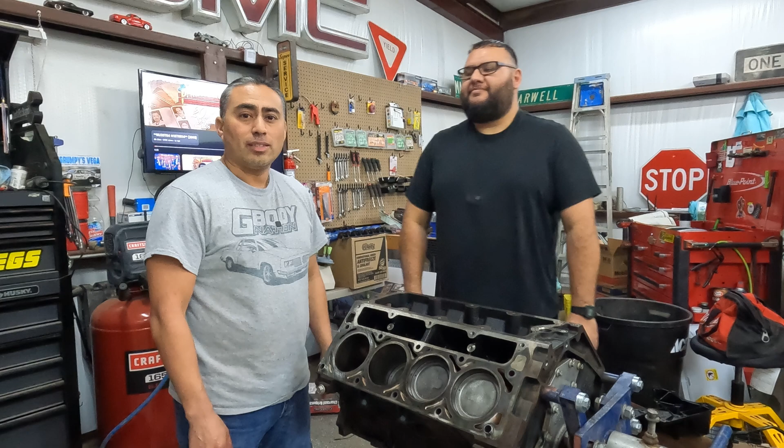We're here with Efren today again. What are we gonna do today, Efren? Today, I'm gonna show you how to install rings onto a piston, and then how to properly lube the new bearings that I got for the rod, I'm sorry, and then how to install the piston into the engine. And then from there, we'll go to installation on the cam as well.

Sounds good. This is his project, the one that had the broken connecting rod. Yeah, so now he's getting it all ready to go. Yep. So if you come over here, he'll teach us a little something today. All right. So I recently got with a friend of mine. He showed me how to clock these rings, because there is a certain way to put them in. On certain designs and certain brands, you have to install them a certain way.

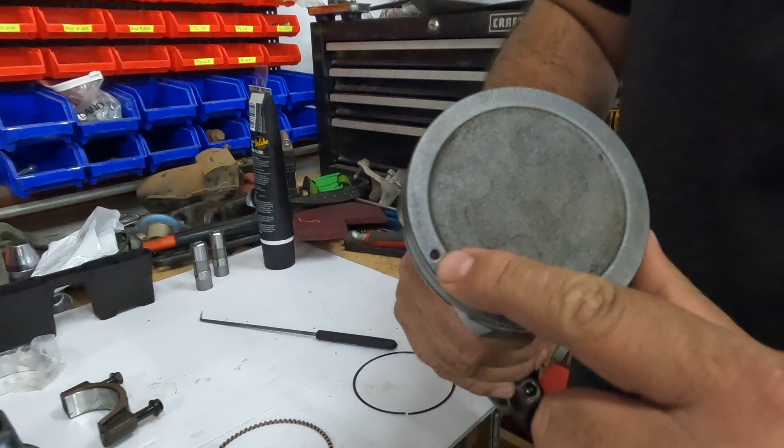So as you see here, I got a piston. Now there's a notch on this piston, this little dot right here. This indicates where it's supposed to go, and usually these dots go to the front of the engine. Now if you install it backwards, it's gonna run not good at all. The reason this dot is here as well is to kind of help you install the rings a certain way. Now this dot will be facing toward the engine.

On this piston here, you use it as a guide as well, like I said. There it is. Okay, so this one's installed 6 o'clock. So with this facing forward, say this is 9 o'clock. You're going to want this to the top of the engine. So it's 9 o'clock on this notch. Now when you install these oil scraper rings, you always want to install it with these two little edges facing upward, not downward, because it will go through. So you want them upward like this.

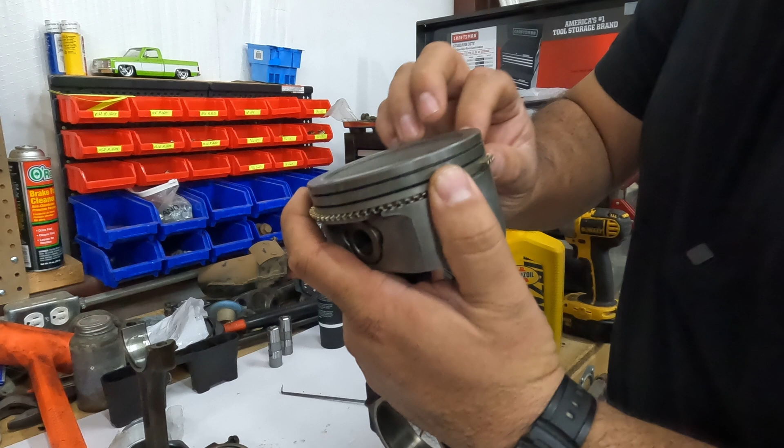So here's the piston. You install it at 6 o'clock, and you just bring it around like this, and when they butt together, you'll see it right here. They're facing upward. So from the dot, this is facing the front of the engine, right? Front of the block? Yeah, to the front of the block. And you're putting them over here on... Yeah, so let's say the dot's at 9 o'clock. So you want this gap to be at 6 o'clock. You're going to look at it as a clock. 12 o'clock, 9 o'clock, 3 o'clock, 6 o'clock. And that's how you do it.

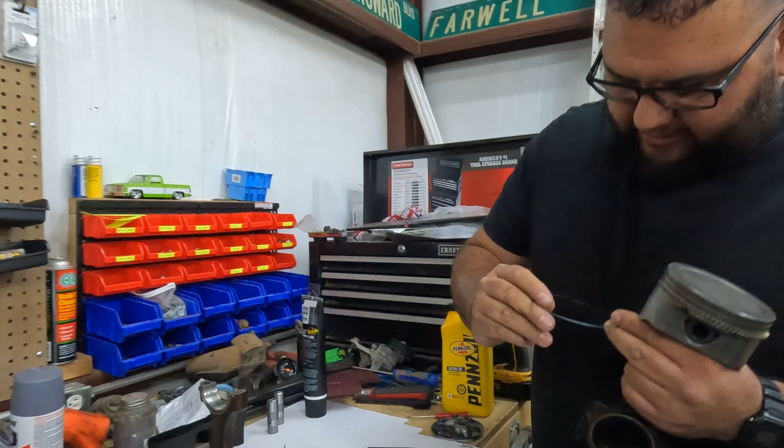Now, the next ring we install. On certain rings, there's some that have a design on them. They'll have like a little dot. This one doesn't have the dot on them. Usually the ones with a dot, it'll be the bottom ring under this one, and the dot has to go facing up. But this one doesn't have it, so I'll use this little crosshatch, this little cross that's on here. So right here will be one angle where it's going to be installed. I'll install it underneath the ring, and you slowly feed it all the way around.

You kind of expand it a little bit, and these are a little bit brittle, so they're kind of hard to install. So you got to be careful whenever you're installing them, because they can break. But once you get it in, there you go. So this one you did right at the... Yeah, like at 7 o'clock, I guess, right? Yeah, 7 o'clock. So this one will be at 7 o'clock here, and then the other one will be installed 180 degrees, so it'll be right at 1 o'clock.

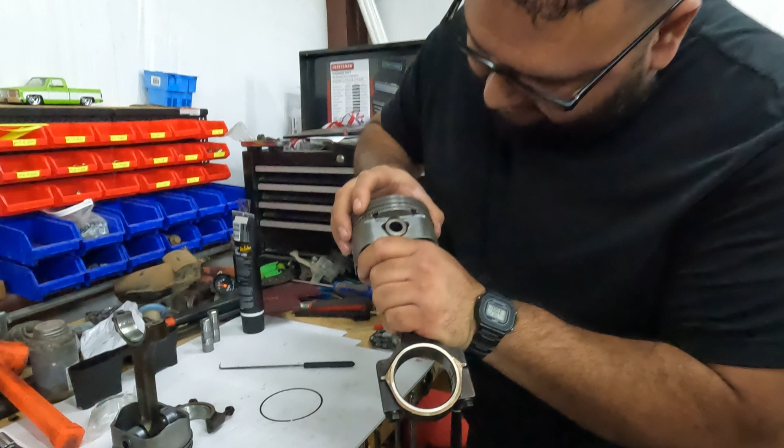Okay. So the same thing, and this one will be above this ring here. Oops. So where this one's at, as you can see, oh, I lost the gap. There it is. So there's the gap. So again, right there. You want to go 1 o'clock. Just use your fingers to guide yourself. Install it on the top side of this ring, on the bottom one, on the scraper, and then you feed it again all the way around. You kind of bring it, and there it is.

All right. Now the bottom oil rings are installed, and these just help keep it from getting loose, because that spring ring is kind of flimsy. Yeah. So these two are installed, so we're good now.

So it's slightly different than the old Chevy blocks, right? Yeah. There was a certain way we'd do all the rings. Yeah, okay, there's a certain way. I know a lot of them are pretty similar, but they're installed differently. Okay. See, I'm not too familiar with the LS. Yeah. We used to do 350s, the old stuff. Yeah. So I'm learning as well on this stuff.

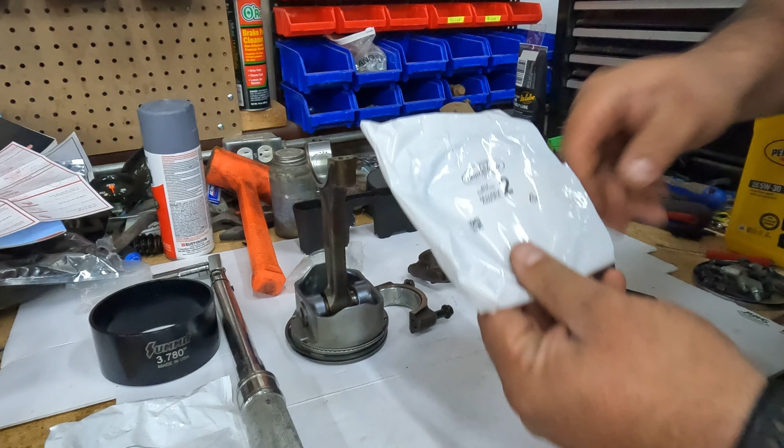Right here. So as you can see here, these are packaged. They all came in different packages. These 2 rings were in one package, and then the spring ring was in its own package. So this is the number 2 groove. And you gotta install these in order. So you always start with the bottom groove, because these expand a little different and they're a little bit harder. They got more tension on them.

So now, since we installed this ring at 1 o'clock, this one's at 7, and the notch is at 9 o'clock. So you want to install this one 90 degrees from this notch that you installed last. So again, be very careful when you're installing these.

Oh, another thing, I almost forgot. This one here is marked, the second groove ring has to be installed a certain way. It says top on there. Oh yeah. I don't know if you can see, there it is. So it says top, so that means to the top of the piston. So again, install it 90 degrees from this last notch. So we'll be putting it in.

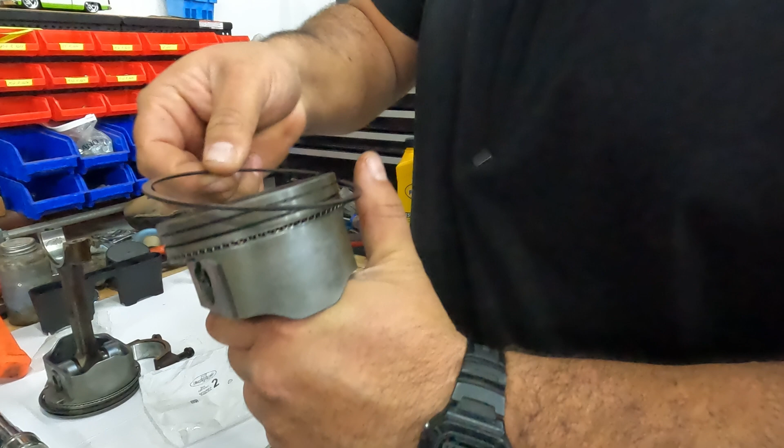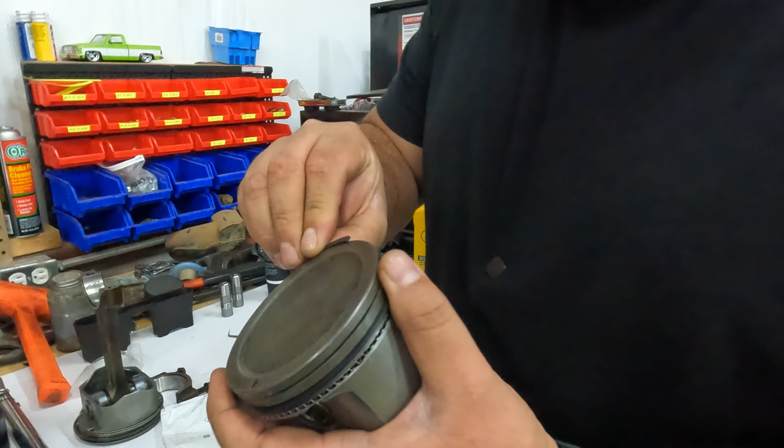And again, be very careful and try not to scrape the side of the piston. I've heard when you do that, it'll mess up the cylinder wall as well. So you can just kind of pull on it a little bit, not too much, but just enough to get it in there. Again, use your little cross. If your piston has this cross on it, you can use it as a guide as well, where everything's going to line up. So there's the second ring already installed with the notch that says top to the top of the piston. And then you went about 5 o'clock? Yeah, this is about 5 o'clock right here.

Okay. We'll move on to the last ring, which is the top ring. This one doesn't have a specific way to go. It can go either way. And again, on certain brands, certain setups, they'll have like a beveled edge on them, and it usually says the beveled edge goes down, I believe, if I'm not mistaken. It's just depending on the brand, but it'll tell you whenever you get it. This one will be 180 degrees from its notch.

So when you install it, again, press it in there slowly and kind of just guide it in again. And just slowly pull on the ring. And boom, there it is. It's installed. All right, so that was just 180 from the last one, right? Yeah, from the last ring over. Okay.

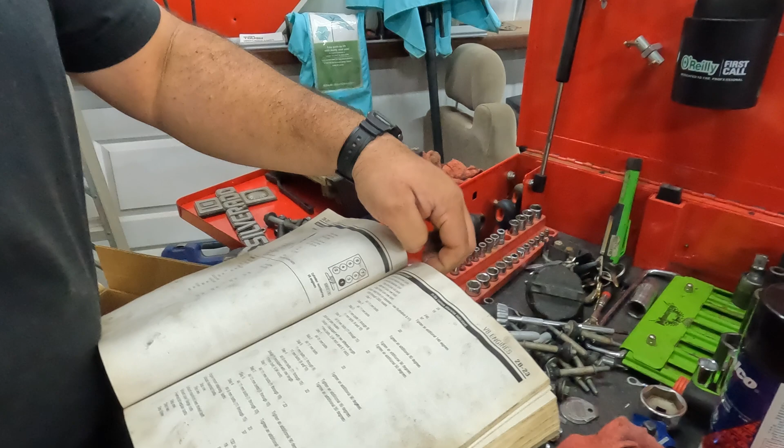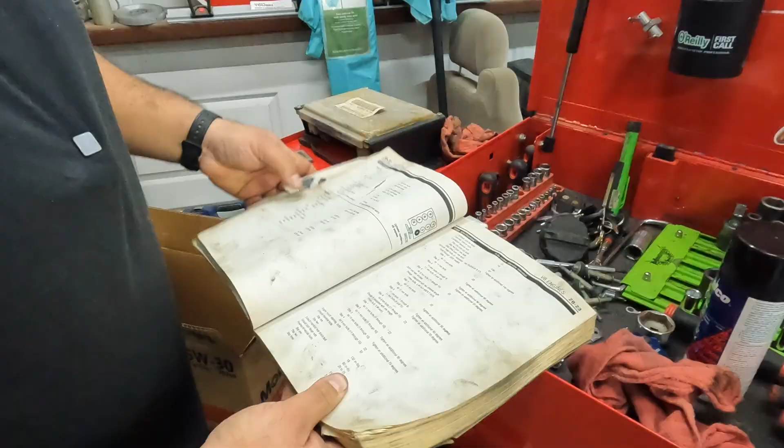So if you ever want to learn a little bit more, if you're a DIY guy like a lot of us want to be, it's always good to buy a manual like this. This is a Chilton book that I borrowed from a buddy of mine based on this motor, 99 through 06. They're all the same style motor. A lot of them have different specs according to what you're building. So as you can see here, I got some of these marked already to help.

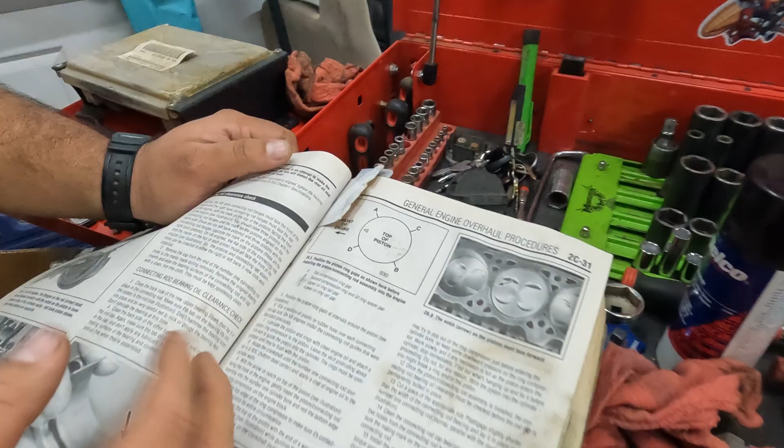Let's see. So this is the page right here where it shows you how to install these rings. As you can see, the lower oil ring rail gap, D, that would be the first one. Now it doesn't show the spring ring because a lot of times you just put that anywhere, but I've always been told to put it at the bottom. And the arrow is the notch, as I was saying, so it's at 9 o'clock shown here.

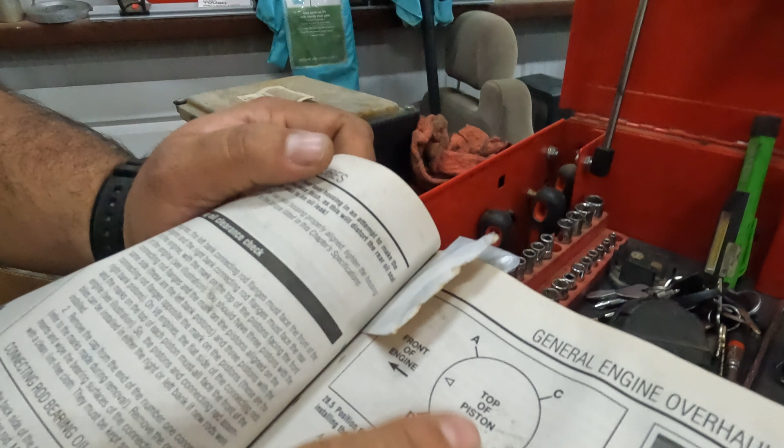Okay, so your first ring will be D, and then C is 180 degrees, and then your second ring, your compression ring, will be at B, which is 90 degrees from C. So you're going backwards basically. And then your first ring will be at A. That's right. And your first ring being the very top one of the piston, right? The very top, yes sir. Okay. So there's that part right there.

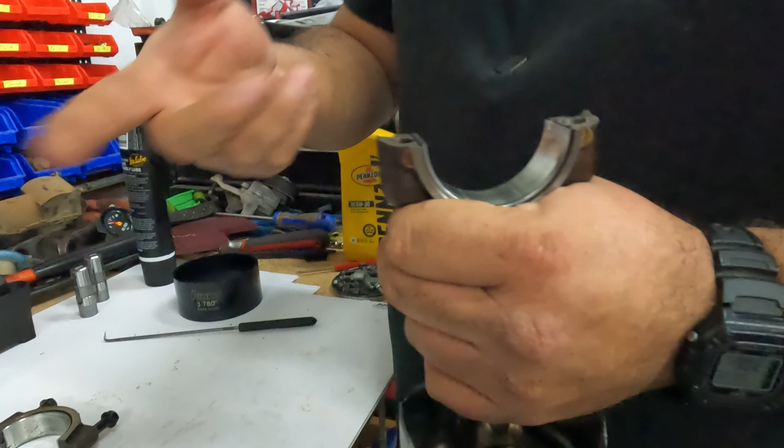I already prepped this one with some assembly lube, as you can see here. Oh, yeah. So when you put your bearings in, and I'll show you how to do that on that one here in a minute, you always want to lube it because you don't want to turn the crank dry, because you'll ruin it.

You'll ruin it. And it doesn't look like you will, but you'll ruin it. I've seen it. So what I do is I'll put assembly lube on here, with some guidance from a friend as well. He says not to lube it over this. You've got to go at least 1/4 of an inch down. Okay. Because if you get fluid or any kind of lube in between here and the rod, it will spin a bearing.

It's happened many times to a lot of folks that have done this. And I heard it from a lot of race car builders that it's gonna happen. So you always want to be careful when you're lubing these. You don't want any lube between the bearing and the rod. Yeah, rod. Okay. Because if you get anything in there, you're basically separating it. This is like a separator. That's how it works. And all this has a specific clearance when it's all put together.

Yeah, and right now I'm working with standard clearance. These are standard sizes. I'm not familiar with the standard size on the rod and the bearings and all that stuff. So yeah, this is a certain way to do it. Again, on the bottom cap as well. So you can see here, I'm a little bit under here, I'm a little bit over here, but it's okay. You can always wipe it off to keep that from happening. Okay. So you don't need a lot of lube. You just need enough to film it, just to make a clearance.

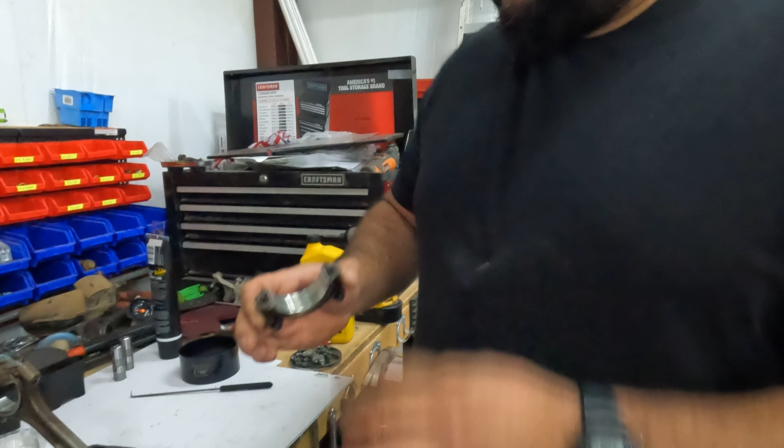All right, so now I got this installer here that I borrowed from a buddy as well. It's always good to lube it. I got a light film of oil on it just so it'll slide through real easy. So what I do is I'll get the piston, and always put your dot. I'll show you that here in a minute, but you always want to put your dot facing toward the front of the engine. But when you put your piston in, put it in carefully.

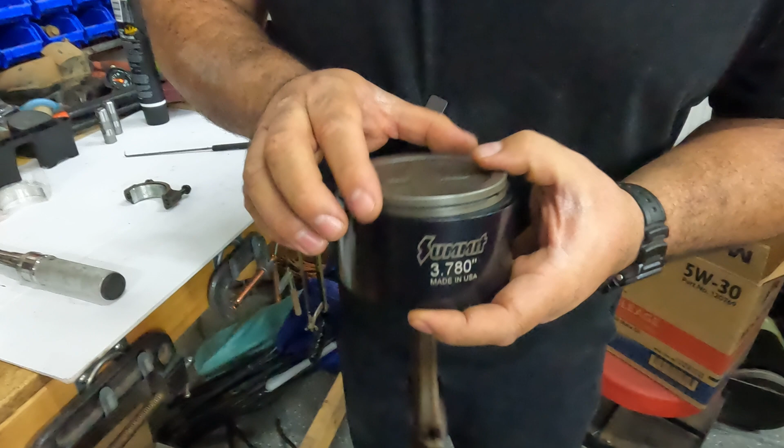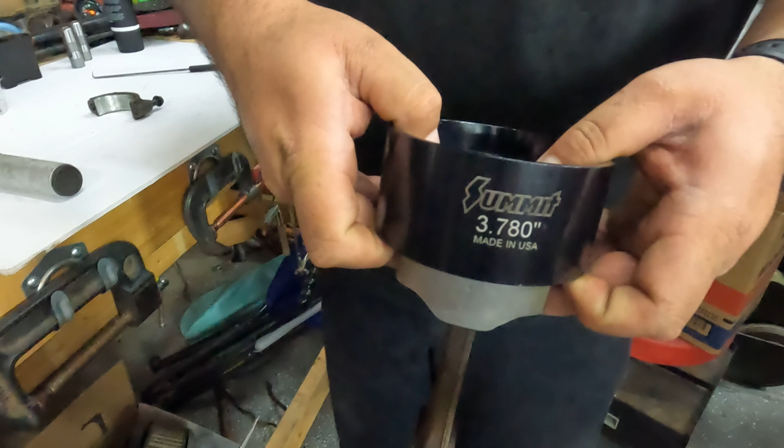So these piston rings are not going to allow you to put it in. So you just kind of work them in a little bit, as you can see here. Kind of work it, and then you slide your piston in. Nice. And then you get it as far down as you can until your skirts show. And the reason why you do that is, we'll come over to the engine real quick. Right. You don't want the rings to come through, because you want the rings to stay compressed as you're sliding it in.

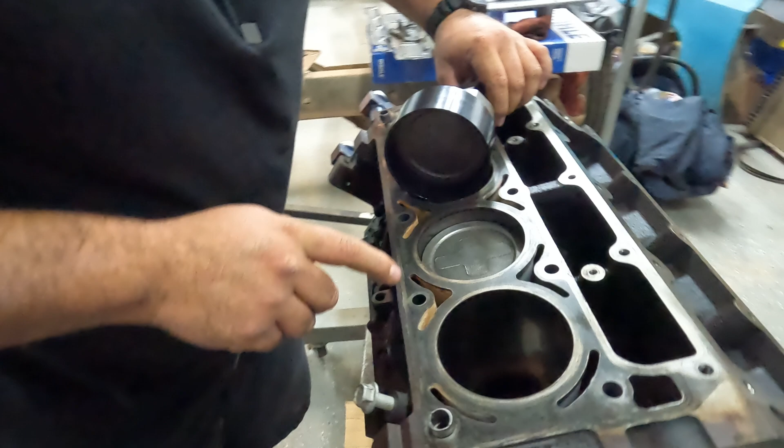Now again, your dot facing forward. To the front, right? Yeah, to the front of the engine. So we're going to install cylinder 2. Piston cylinder 2, yes. This is piston number 2. Cylinder 2. Okay, so before I move forward on that, you want to put a little bit of oil on the cylinder and make sure your cylinders are clean too. As you can see here, this one's a lot clean. So you always want to lube it. Now when you lube it, the rings are going to get a hold of that oil and push it down.

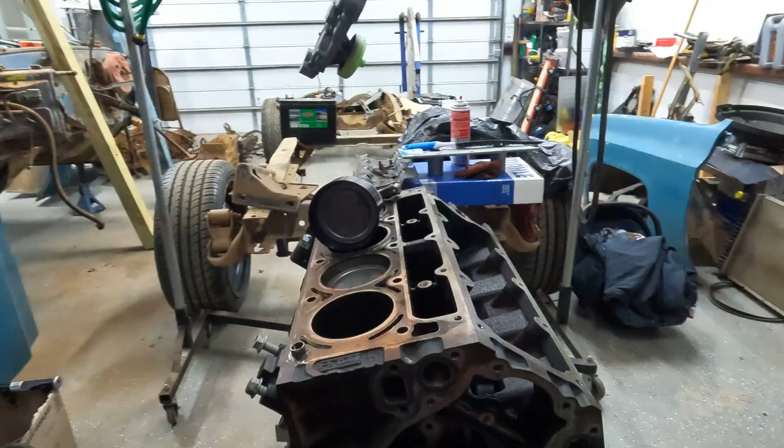So I just got this container here. What I do is I'll put some oil along my finger, and just kind of rub it in there. And you don't need to lube the whole cylinder, because it's gonna push all the oil down once the piston gets back in there. So just what your finger can reach? Just what your finger can reach. Just kind of do that.

And I know it sounds kind of repetitive, but I just repeat to make sure, if you're not sure how to. Yeah. That way, I'm asking them again just to make sure that we're all on the same page. Yes. Including myself, because I haven't done this kind of stuff in a while, so I'm refreshing my memory right now.

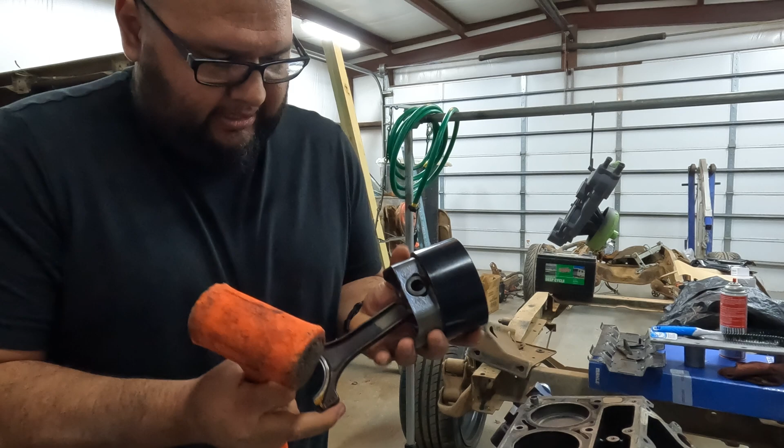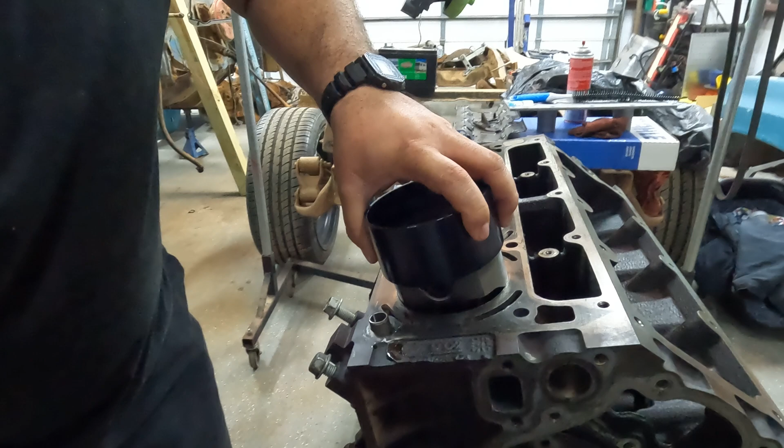So when installing a piston, always get yourself a soft hammer, or dead blow, or whatever they call them. And you get your piston. You don't want this touching the cylinder wall, so you want to go in as carefully as you can. Get your piston lined up into the cylinder here. All right, cool. So now the skirt's in, and come along over here.

So you always want to make sure to keep your notch perpendicular to your edge here. You can see it, and if you've got a good eye, you'll know. You're talking about this little notch here, right there. Yeah. Okay. And you can see it on the other pistons here. They're all facing forward. Okay. Now you want to use the end of the hammer, and you can use a wood hammer too. Just barely tap it. Just make sure this is all the way down, seating real good, and you just hit it.

And there it is. It's in. Now we move on to the next step. What I can do too is kind of bring the block over a little bit. Kind of keep it level to the floor as well. It might not be that level, but it's close enough.

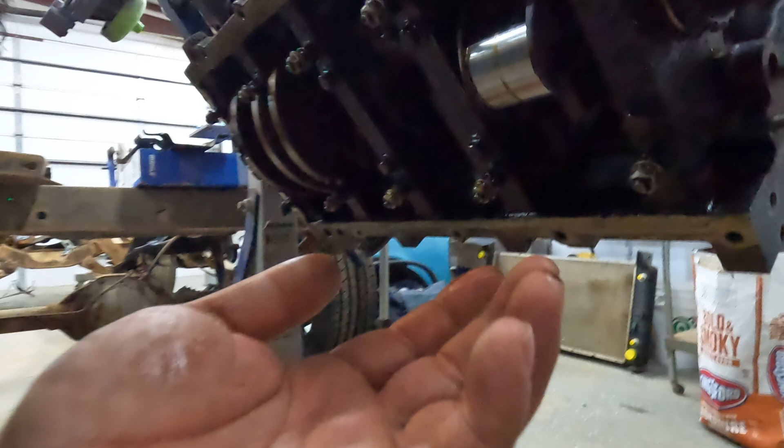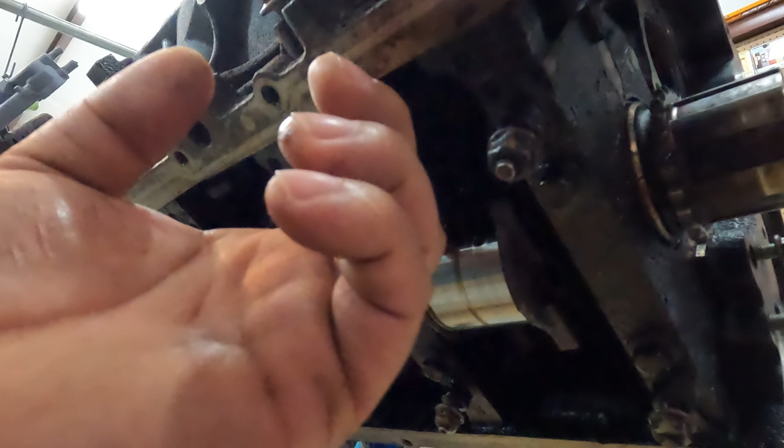Yeah. And you want to come down here, and as you're tapping this in, you'll see, oh, block's coming. You're moving it. Yeah. So I'll bring it back this way just to here. So you just want to kind of guide it so it doesn't bang on your crank? Yeah, you don't want it to hit the balancers or the weights on the crankshaft, and you kind of want to guide it as well. All right, and there's that one. Once you're done there, then you just flip your engine over.

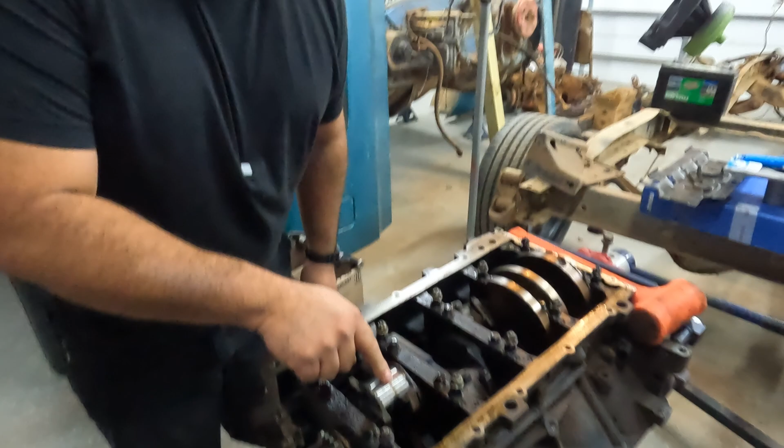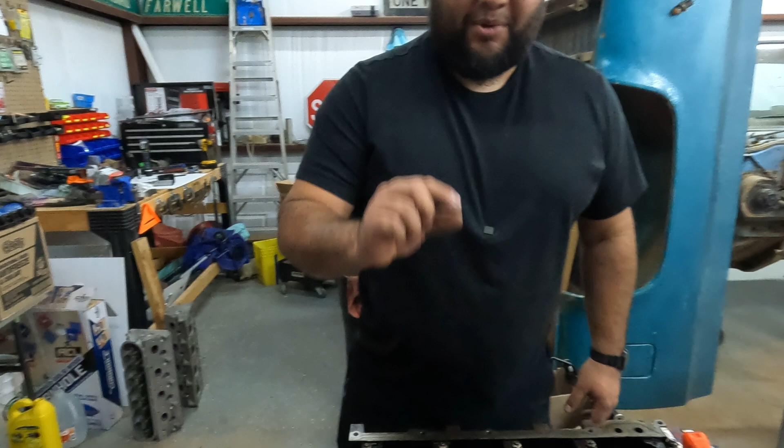All right, set this here. So another thing I forgot to mention, make sure your journals are clean. Make sure they don't have trash on them. I did clean this one before we started. So always make sure these are clean, there's no trash, because the clearance on these things is like thousandths of an inch. I mean, you're talking like the size of a hair. It's small. So any little bitty trash that's in here will ruin that cap, or it will ruin the bearing. So yeah. All right, let me get this bearing cap right quick.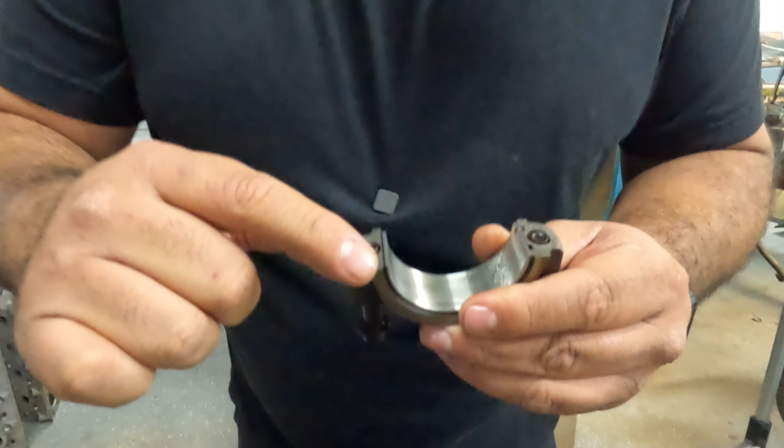Now, a lot of these rods, you cannot change this cap to another rod. It will not fit. And the reason why, when these are made, they break them. You can see how this one's broken. When this was broken off of this rod, it has to be matched up to this rod only. And they only go on a certain way as well. As you can see here, this edge is rounded and it's squared off right here. So you got to put it on the same way. See how it's squared off here and then it's rounded? This is the way you want to put it on.

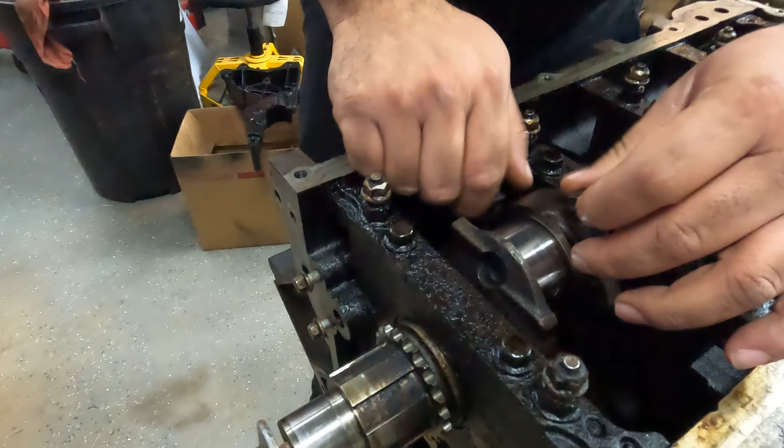Okay, got it. What I do is I'll tighten them by hand first. Get them all the way down. And I'll show this process on the next rod before we take that one apart and clean it. So we'll get this on, and if you don't have a torque wrench, you can actually buy these at Lowe's or Home Depot. O'Reilly sells them. I think they rent them out too if you don't want to buy one. These are real cool to have.

Now in the book, I went over it. This is supposed to be at 15 pound-feet, or foot-pounds like a lot of us say. So it's already set at 15. So you just do increment turns. So I'll do a little turn here, and then this one a little turn. That way it goes down evenly? Yeah, that way it goes down evenly. You don't want it to be too tight on one side and not tight on the other. Right. And then you'll see the torque wrench click right here. Oh yeah. And then just to make sure it's all the way down.

Now, these are torque to yield, and torque to yield means once you get it to its first torque setting, then you got to do an angle torque. And I have a torque wrench for that, so I'll show you out here how to do that in a minute. And the torque to yield, once you use it once, you can't reuse them, right? On certain blocks you can't. On certain ones you can. And these are reusable. Okay. I actually asked a friend of mine. He said these are reusable.

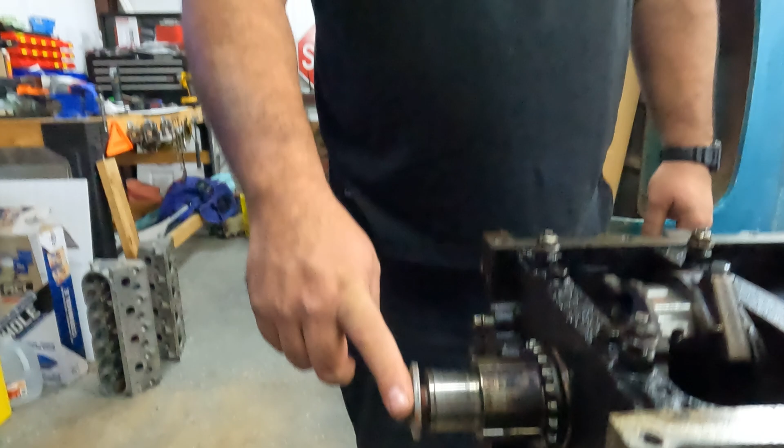All right, because that would be a question I would have. So I'm asking for myself as well in case I ever needed that. Because I know some of the engines we worked on were torque to yield bolts, and they said do not reuse, but I wasn't sure. Yeah. What you can and can't. At the dealership I worked for, I learned that on a lot of the newer engines, a lot of the bolts you couldn't reuse again. Like this bolt on the new engine, you can't reuse it. You can reuse this one for 3rd gen LS. You just got to torque it a different way.

So now, always make sure this doesn't move up and down. As you can see, it's not moving up and down. The clearance is just right, but it's able to move side to side. That's okay. That's no biggie there. Once you put the other rod in, you'll have your little bit of slack there, but that's okay. All right, now we move on to the other piston and rod. All right.

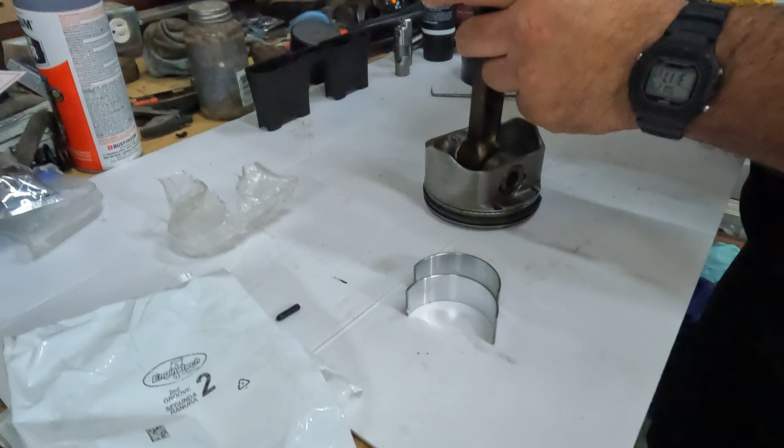All right, so these right here are the bearings. Now, a while ago when I was talking about making sure everything's clean, you want to make sure these are clean too, because these do come oiled from the factory that makes them. Okay. So yeah, they can have a little bit of dirt or something. Yeah, exactly. And they'll have a little bit of a film on them or something. So again, as you can see here, this belongs to this rod.

And when you're working with pistons and rods, one at a time, every time. Do one piston at a time. Don't take them all apart and then go back to putting them together and mix them up, and it becomes a mess after that. A lot of times too, you can always mark them. Get you some paint markers, different colors, and mark them. That way you'll know which one goes where.

Because we used to mark them 1-1. Yeah. And we'd mark it here. Yeah. And then on the other side. Exactly. And a lot of older mechanics will tell you that. Make sure you mark your rods. But me, I like to work on one at a time because I'm that kind of guy that will mix something up accidentally, and it's happened before. Anybody will tell you that it has happened.

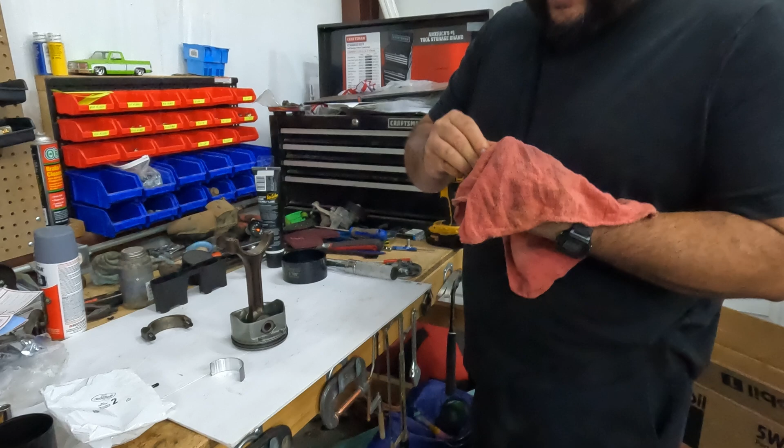Sorry, let me get my cleaning rag real quick. All right. Man, it's been a while since I've messed with this kind of stuff. Me too, man. Honestly it's been a while for me. I put some engines together lately, you know. Yeah. But I didn't have to mess with this part. It was just camming, heads, that kind of stuff. The intake, of course. But this has been a while for me on LS. This is the first time. Oh, okay. So I haven't really messed with LS pistons. I'm learning as well, just like everybody else.

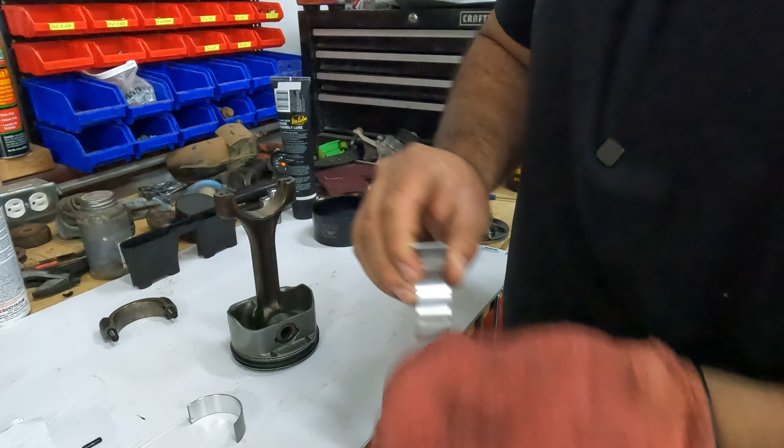All right. So like I said, clean these real well. They just have a light film of oil on them, just to keep them from rusting, which these don't really rust. I think a lot of these are aluminum now, so they won't really rust, but just to keep contaminants off of them, like dirt and stuff. They do that for that reason.

See, when I'm going to do something, I look up on YouTube as well, and sometimes I don't find anyone who actually shows you step by step, and they just kind of assume you know the stuff, and sometimes you do not. Yeah, exactly. So I watch another video till I kind of piece it all together. Exactly. So this way it's all in one, and you can just get it done if you need to.

Now this piston did sit out. I had already cleaned a lot of these prior to this video, but I'm going to clean it again just because you never know what little bit of trash is floating around. So just go over it a little bit again. Make sure there's no oil, there's no dirt. Same thing on the bottom one. Make sure there's no oil or dirt. Just go over it again, just like that.

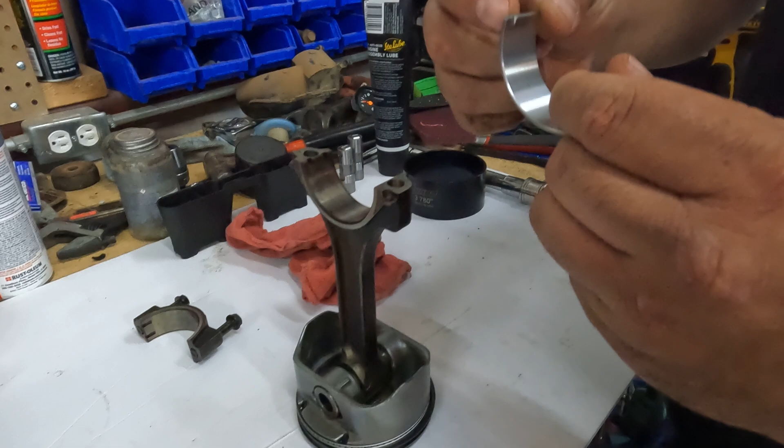And then there's notches on these rods. There's 2 notches, all right? And the reason for these notches is for these rod bearings. They have a little notch on them as well. You want to line them up with that notch. You can see right here. And evenly press on it. You'll get it in there. Make sure this notch lines up with it, and boom.

And it's in. It looks like it's pretty even on there. If it's not, you can press one side and it'll slide over. But once you get it in there, it's staying in there. It's not going anywhere. Now, same thing with the bottom, with the cap. You're gonna line up your notch.

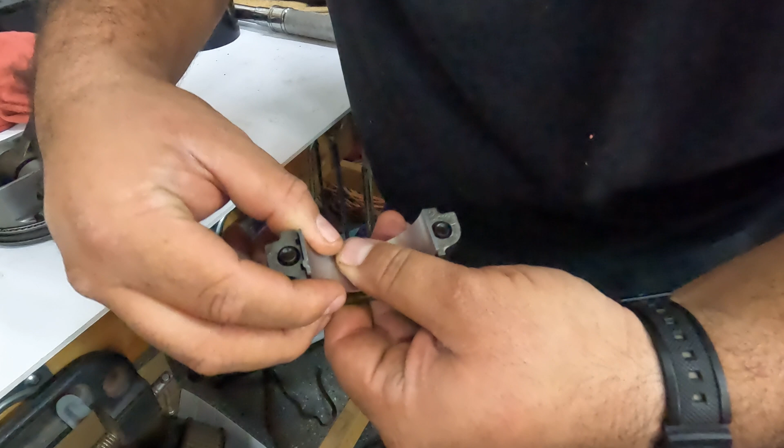Line up your notch with the one on the rod, and it's evenly pressed down, and there it is. Again, you can see right here where it's kind of popped out, so you just press on it. It's good to go. Once you have that on, then move on to assembly lube.

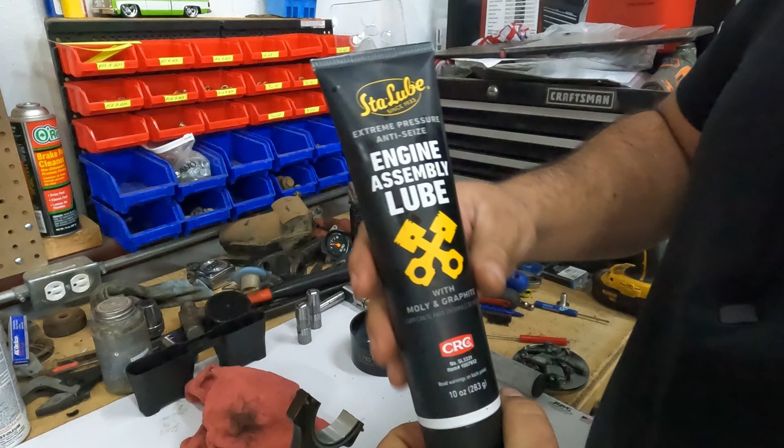What kind do you use? What do you like? Well, I just bought one. This is the Sta Lube. This is assembly lube. It's moly and graphite, which somebody told me I could use. It wasn't going to hurt it. Sounds good. That way, in case someone doesn't really know about that either. And there's different kinds out there that people use.

What I will do is put a little dot on my finger. The reason why is, like I said, you don't want a heavy film on here. You just want a light film. See, I got a little bit right there. Just kind of clean it off, because again, you don't want this in between the bearing and the rod. And there it is. Just a light film, nothing heavy.

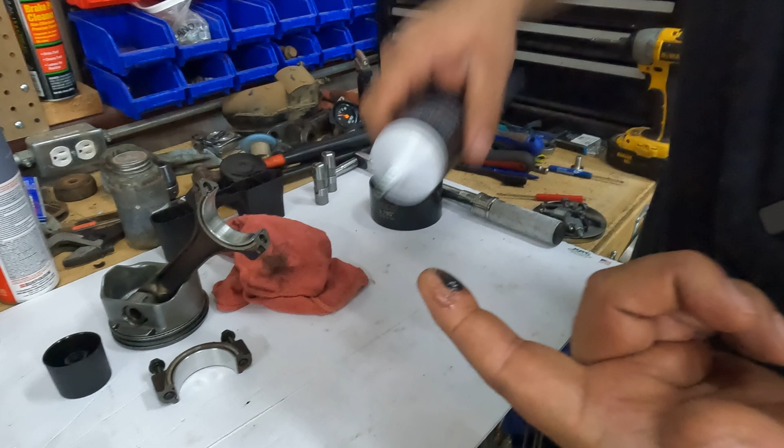The reason why you want a light film is this will spew out once you bolt it into the crank journal. And you don't want it to get in here again, because it will get into the sides. So just do a light film, and there it is. All right, so there's that part. We'll go ahead and install this one as well. The rings were already installed on this one, so we'll go ahead and get it ready.

Let me put some oil on this installer right quick.

It's exciting, man. I like working on engines. I just don't do it very often. Yeah, I know. And this has been a long time, so this is pretty cool. My dad used to do all this stuff when I was a kid, and it's fun. It brings back memories. Yeah, I know. I did my first engine back in college when I took this course, and I enjoyed it very much.

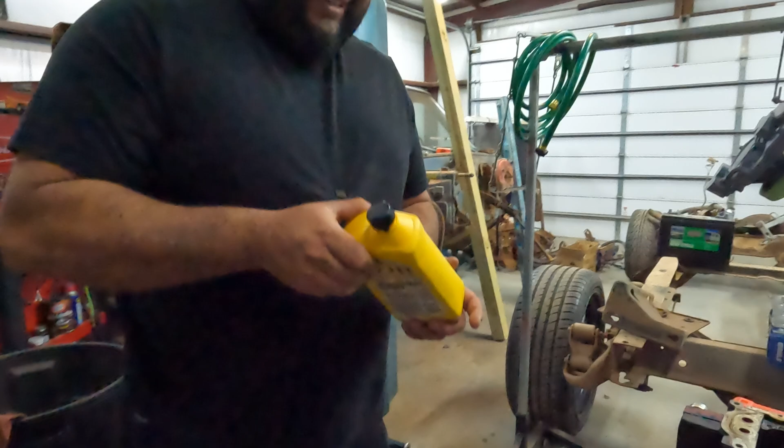But if you have the patience for it, man, go for it. There's a lot of videos and research out there on how to do this stuff, whether you want a basic daily driver engine or a racing engine. Always find a guy too, man. There's a guy out there that knows tons about this stuff. The guy I've been talking to, his name is Michael Jordan. Down to earth guy. He's been guiding me a lot, and he actually has a race truck he's building right now.

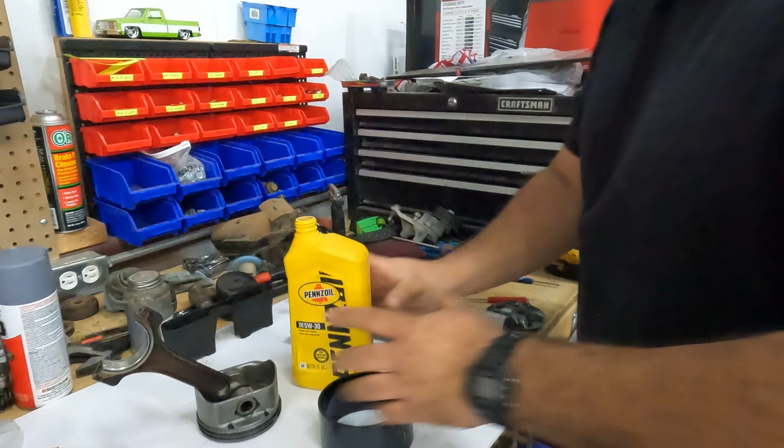All right, so I want to lube this again since the last piston scraped it off. I'll get my finger in there, get a little bit of oil, and work it around the tool. As you can see, it's just a light film. You don't want it heavy or dripping. Same thing on the cylinder. Let me come back over here, put this back down, and rotate the engine.

So we are installing the last piston, which is piston number 1. Number 2 was the one that was broken, right, Efren? Yes, number 2, the rod was broken. And you put new rings on all the pistons prior to today. So we just left two of them to show everybody how he did it. Yes. All right.

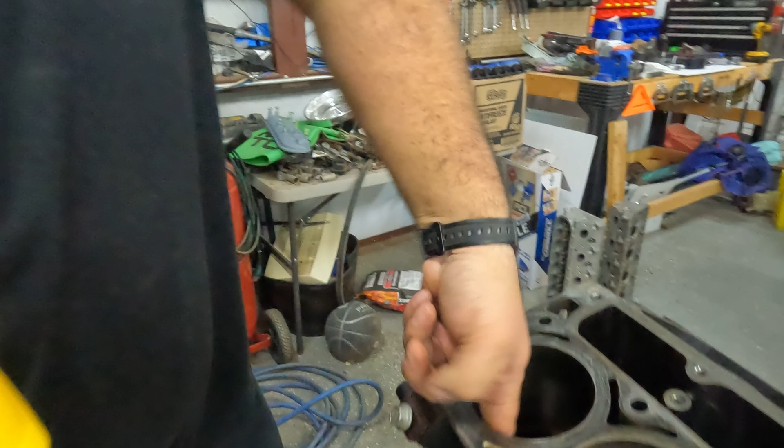So again, put some oil on your finger, get a little bit on there, and then work it around the top part of the cylinder. All right, you'll see it's got a light film in there, and we'll install it.

Again, I'll show you again how this works. As you can see here, that second ring, the compression ring, is already in on this side, but it's not on this side, so you just kind of work it in there. See how it slides in real quick? Here's the top ring, same thing. Push it in, slowly guide it down. Again, you don't want the bottom ring to show, you just want the skirt to show, okay?

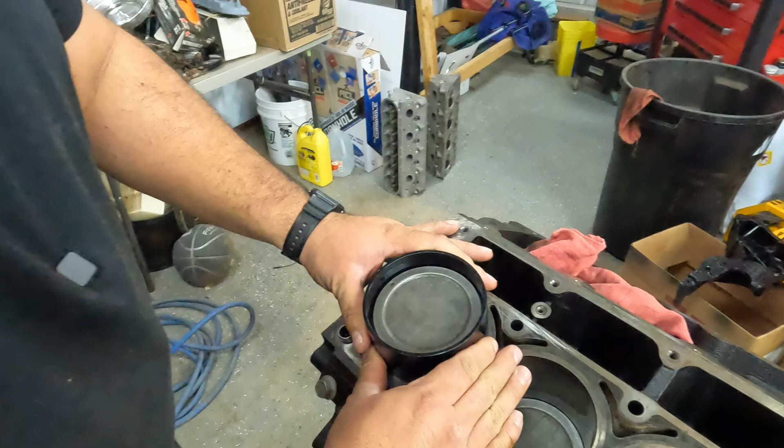So, all right, I'll bring this over here. And again, you want the notch facing to the front of the engine. So you slide this in very carefully. Okay, make sure your tool's flat. Make sure your notch is as straight as you can get it. Kind of eyeball it and watch it. And there it is. It's in.

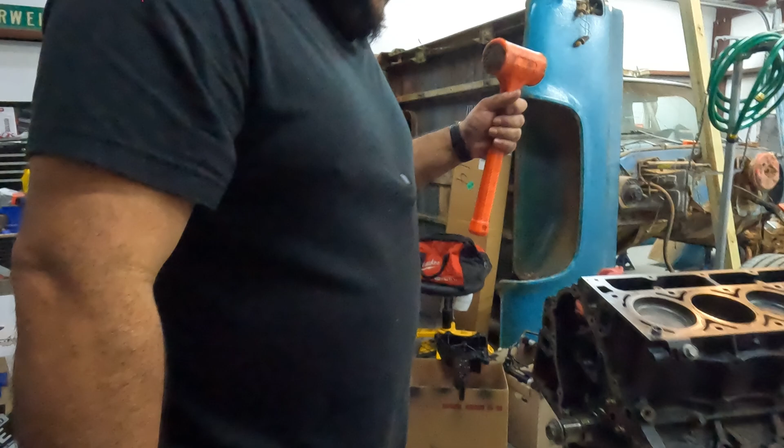Now, why I say you need to keep this flat is because if it is a little bit off, a ring can come out. And if you keep hitting it, you can break a ring, and you'll ruin the piston as well. So you don't want to do that. All right, so back to the last part of this. Same procedure as the first one? Same procedure as the first one. So he's going to guide it in, and you'll see the rod here in a minute. You see it? It's coming. And there it is. It's all the way in. And then we'll put the cap back on it.

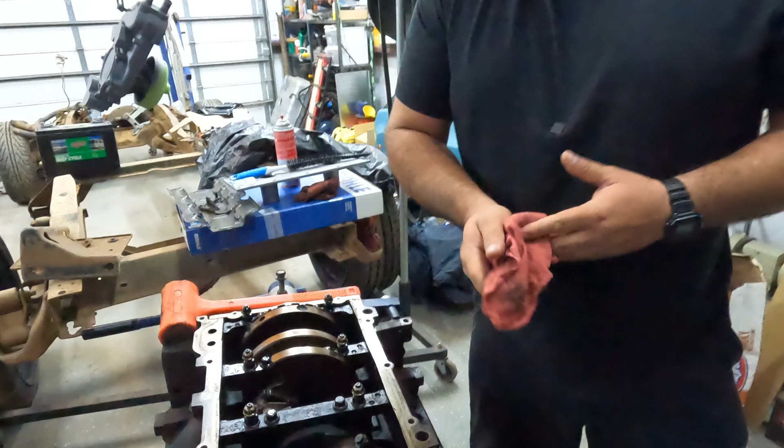Just a rule of thumb when you're doing work like this, it's always good to have a buddy with you to help you hit the piston down while you guide it, and a lot of times to hold the engine, because you want to leave the engine kind of loose to be able to rotate it whenever you need to. All right, again, make sure your journals are clean. Make sure your rods are the same. You've got it squared off here and beveled over here, so you want to match this up exactly. And tighten everything down by hand again. Just make sure you get it as tight as you can. There you go. And then torque wrench.

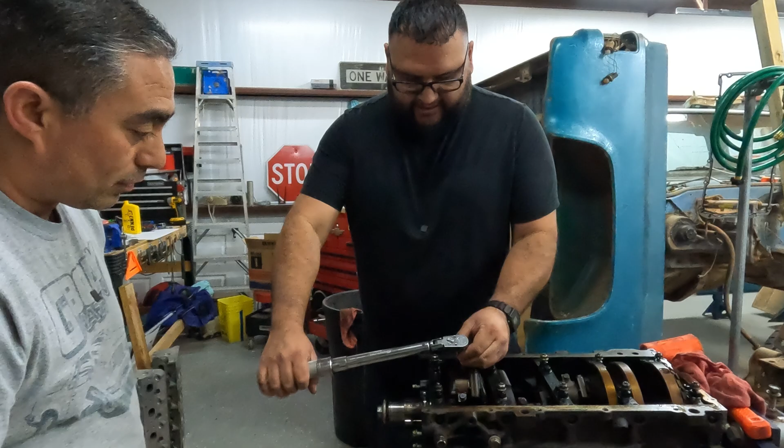So now when you torque it down to the 15, since they're torque-to-yield, you still have to do something else to it, right? Yes, I have to do an angle torque, and I'll show you how to do that in a minute. So again, slow turns. And then you'll feel the click. Right there, there's the click. These are all torqued at 15 pounds right now. I did all of these in order according to the crank: 7 and 8 first, then 5 and 6, then 3 and 4, and then 1 and 2. So the way I put them in is the way I'm going to keep torquing them until I'm done.

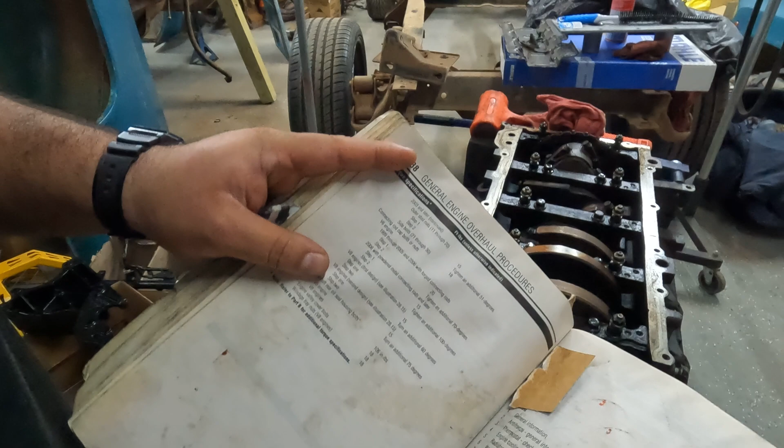I'm going to turn the crank to get rods 7 and 8 back up. Get them up where you can get to them? Okay. And there they are right there. Okay, so here in the book, I had this page saved for that reason. General engine overhaul procedures. I'm on the connecting rod cap bolts or nuts, and these are bolts. Some of them have nuts. So this is a V8 engine, second design, and the reason I know it's a second design, this bolt right here has a little notch in it that keeps the bolt from falling out of the cap.

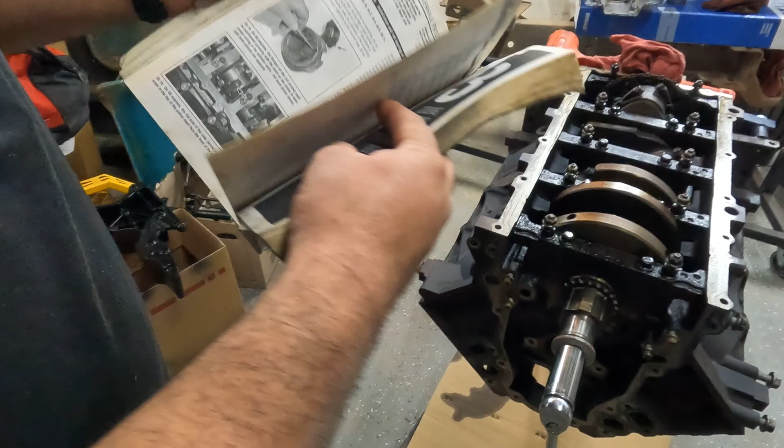So, second design, step 1, 15 pounds. Done. Step 2, you're going to turn an additional 75 degrees. So let me get my other wrench out real quick.

Yeah, I remember the ones that just had the nuts. We'd put some little rubber deals on them so they wouldn't bang on the crank. Yeah, that was a long time ago. And actually there's a kit out there. You can put the little rods in and put some rubber hoses over them to do the same thing, just to guide it. Of course, I don't have any of that.

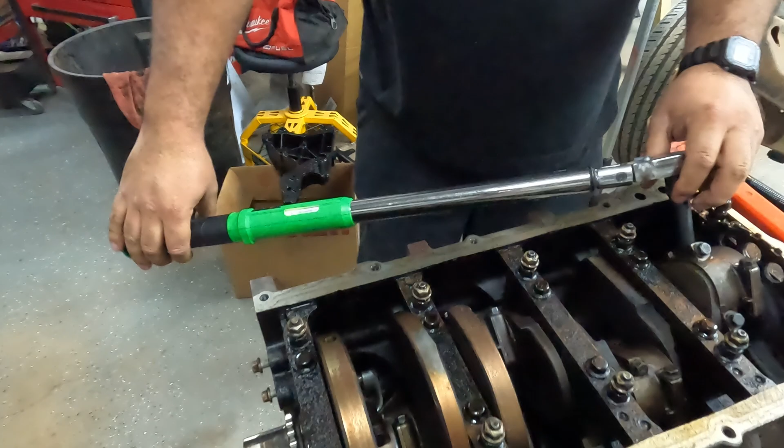And I've got my little friend here, already set up for 75 degrees. And we move forward. So again, start with the one you installed first, which is number 8. And you'll see the indication here on the tool. So you'll go. There we go. Okay, 1 degree over, but it's fine. Okay.

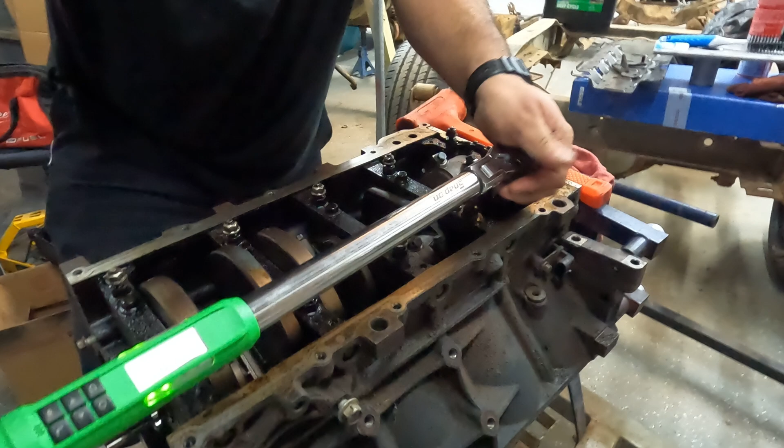All right, there we go. So that's how you do it. Same thing on number 7. There we go. Again, it went a little degree over, but it's fine. It's no big deal. So it shows you on the little screen where you're at, huh? Yeah. And you'll see it. You can follow it. That way you can see. Yeah, let's see that. There we go. Cool.

Okay. Just so we don't make this video way long, he just did these. He's gonna just rotate, do these. We're just gonna go all the way to the front, and we'll be back shortly. All right, so getting to the last one, right, Efren? Yep. Yes, sir. All right, that's good. Okay. Well, I said last one, but it's last set because it's the last two cylinders. There we go. We're done.

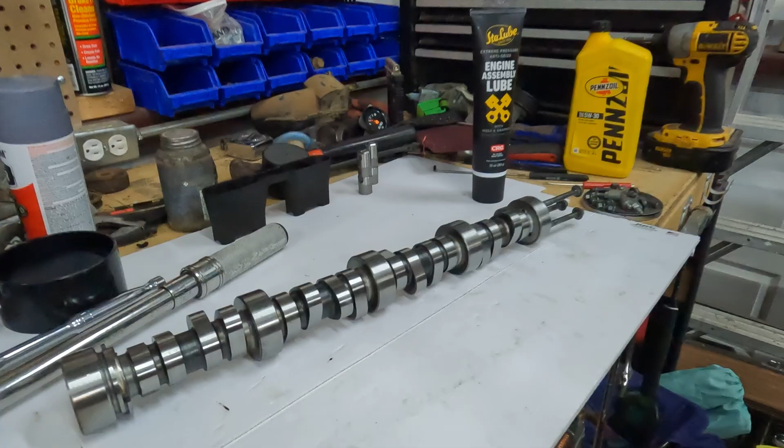That's the torque-to-yield bolts, right? There it is. We're done with that part. Finally. All right, guys. Time to put the cam in. Here it is. Sloppy Stage 2, courtesy of 806 Rebel Racing, West Texas.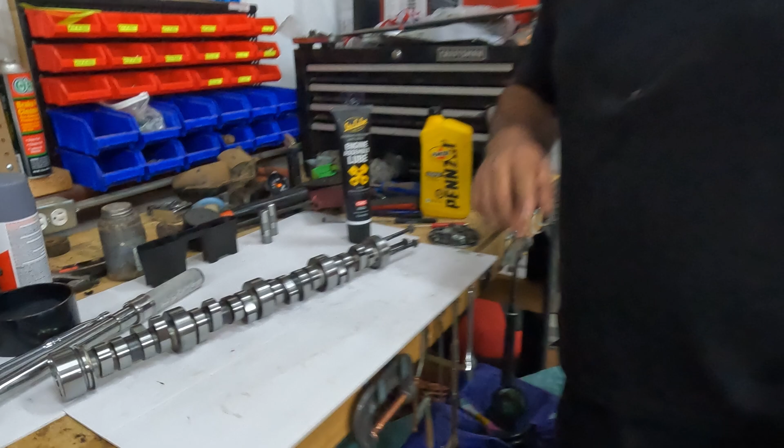And you don't have the tool, right? But for people that don't have it? Yeah. This is what I did. I actually took the water pump bolts and just stuck them on the end here. As you can see. That'll work. And it just helps you guide it in a little bit better. So trying to put it in without it is hard. Yeah, it's really hard to put it in without a tool or anything.

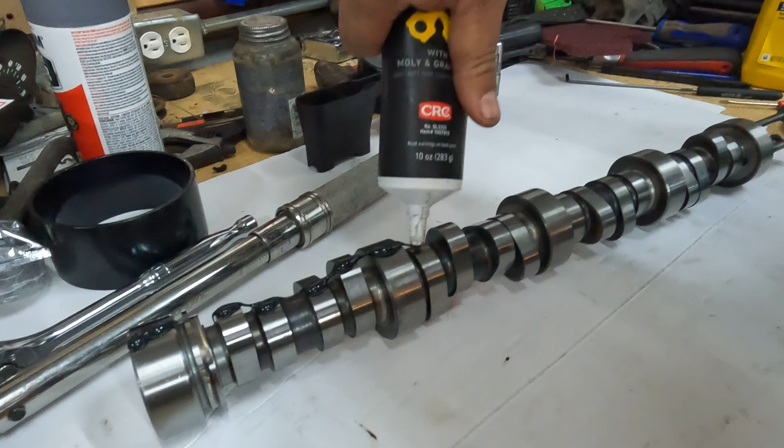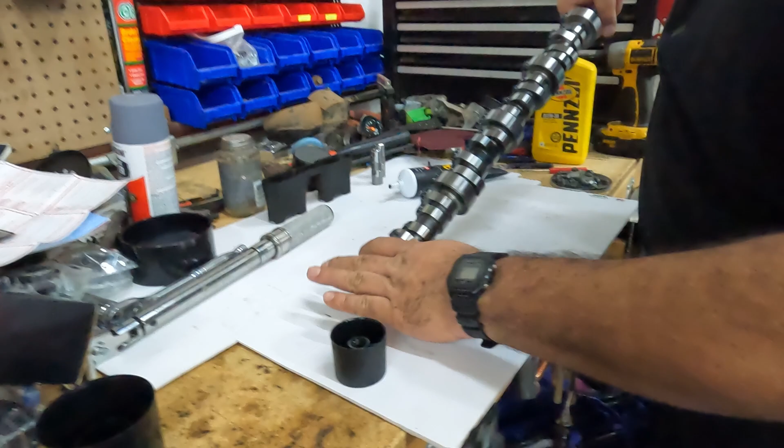All right, so now we're gonna lube this thing up. And on this one, what I'll do is I'll put a little dab here and there. Put them on all the lobes. And once we get everything pretty much ready for lube. Now, normally I wear gloves, but not today. So what I'll do is kind of just run some of this lube through the lobes a little bit.

And the reason you want to do that is because when you're sliding it in, these can get caught on the cam bearings. And you don't want to mess up any of the bearings, or even the cam. You don't want to mess the cam up, period, either. So just kind of, again, like we did the rod bearings, just do a light film all the way around. Rotate it. Just like that.

A lot of people cam, and this is what they do. Yeah, and a lot of them do it for performance or whatever, you know. And I'm just doing mine for sound. I like performance, don't get me wrong, but I'm a budget kind of guy, and I don't like to spend a lot of money. So one day maybe, but we'll see.

All right, now there's the cam. It's ready to go in. All lubed up and ready to go. So what we do now is you slide it in slowly. Just kind of let these sit a little bit. Sometimes these are a little bit higher, but you just kind of work it in and it'll make its way in.

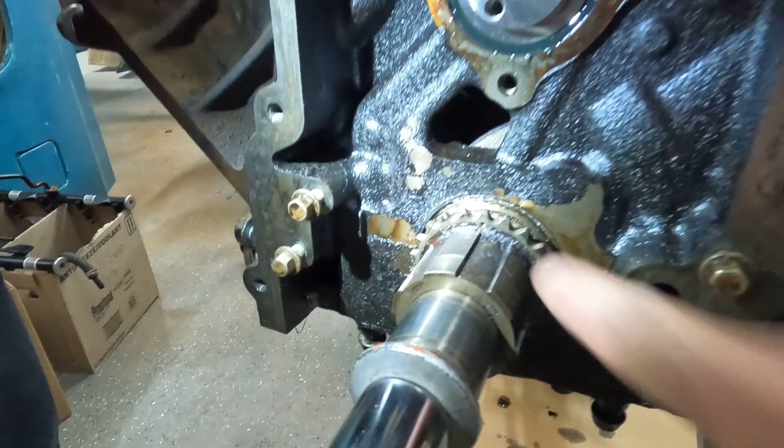Okay, and it's done. So now you're just removing the bolts, right? Yeah, right now I'm removing the bolts. I believe it's the same as the small blocks. As long as this dot right here, you can see it. Oh yeah, there's a dot. You want to make sure that's at 12 o'clock on the block. He's talking about that dot right there, just like the old blocks used to have. That dot will be at 12 o'clock. Cylinder 1 will be at top dead center, which is this one right here, guys. Yep.

Okay. Once you have your crank lined up, next step is you'll bring your cam sprocket. So this is the back side. This will go toward the cam. There's a notch for this little dowel pin right here. So you'll put that notch on that dowel pin.

Let's see. There it is. Okay, once you have that in, then there's also a dot on the sprocket. You see it right there. You want to line the cam up 6 o'clock with your dot on 12 o'clock on the crank. Two dots, will these match to each other?

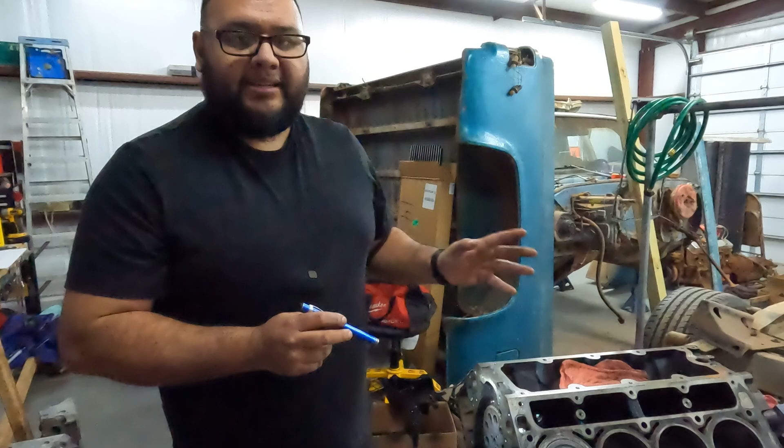Yeah, and the reason for that is for timing. This cam has to be in time with the crank because every one of these cylinders has to be in time with your injectors, with your coil packs, everything. And if they're not in time, this engine will not run. And if it does run, it's gonna run like crap. Yep. So definitely, it's always about timing on all the engines. They all run on time.

Some of them run on a higher advanced time. Some run on a retarded time, and it just depends what you're running. It just all depends what you're doing. Again, this is a stock build, so we're not doing nothing too radical on it. All right, once you get these lined up, your dowel will stay where it's supposed to be. Take your sprocket back off.

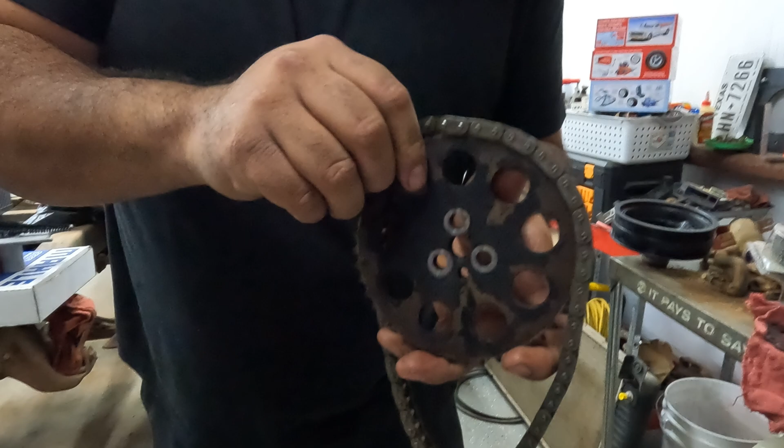And you'll get your chain. Put your chain on, just like that. You get your bolts. Or, I missed a step, I'm sorry. Just now realized that. We need to put our cam holder in first. That's right. The old ones didn't used to have that, a lot of them didn't. The Vortec did, and then now these.

Yeah, so this is a real crucial step. Do not forget this. This actually keeps your cam from moving around, because these do have a little bit more clearance than your small blocks did. So once you put this bad boy in. And turn on your little flashlight so I can see just a little bit. Right there, you go. Just to have a little bit more light on here. Yeah.

These are set to a spec as well, and I already memorized that. These are set for 18 pound-feet or foot-pounds, however you want to say it. All right, so let me get my torque wrench out quick. All right, so here we go. 18 foot-pounds. So again, just kind of evenly tighten it all the way around.

And come back to this one. Click, click, click. There we go. All right, once that's on, you're ready to go. All right.

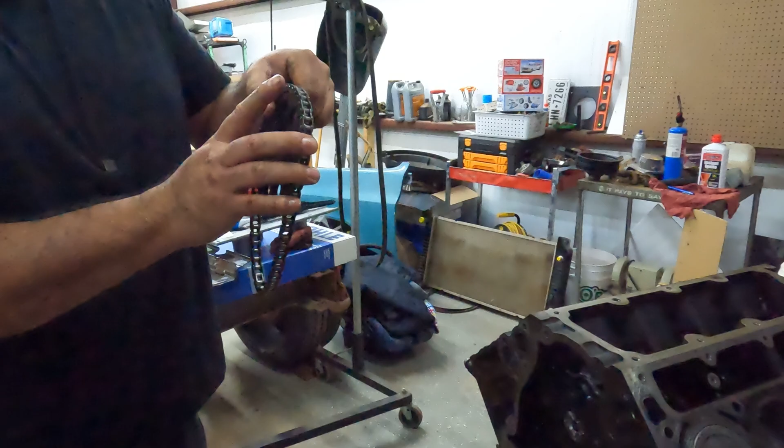Okay, sprocket, chain. So what you'll do is you'll get your chain back on here. Just put it on the bottom sprocket, right? Yeah, you're gonna put it on the bottom sprocket. And then line it up with your cam. Okay. Start one bolt. Okay, now we got one bolt. Should be good now. Sometimes if you can't get it to line up, you're one tooth off one way or the other. Yeah, and you can move it until that lines up for you.

This is a tooth off. Is it? As you can see, it moved here. Oh yeah, the dot's a little bit off. That's true. Okay, so we need to fix that. Yeah, you can see these two dots. They're not matching. They're not pointing directly at each other. So it's very, very critical that y'all watch that every time.

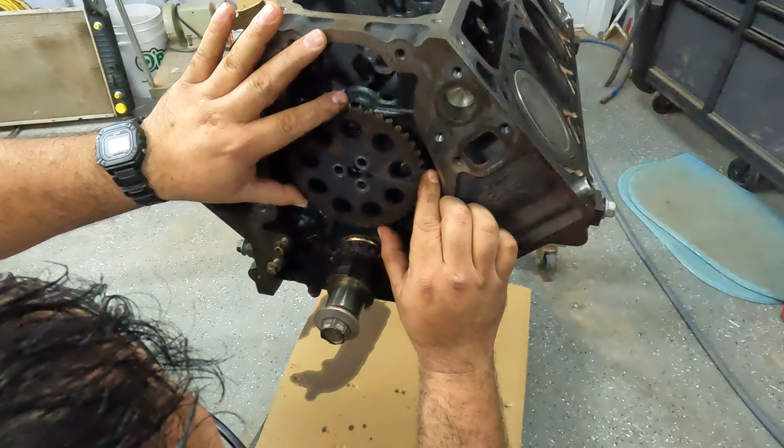Put this back on again. Line it back up. Okay, we're lined up right there. And all he's doing is just lining up them dots one more time because they move slightly. Okay, and put your chain back on. There it goes again. Right there. There it is. Dot to dot. Get the bolt back on there. Okay. And we move forward from there.

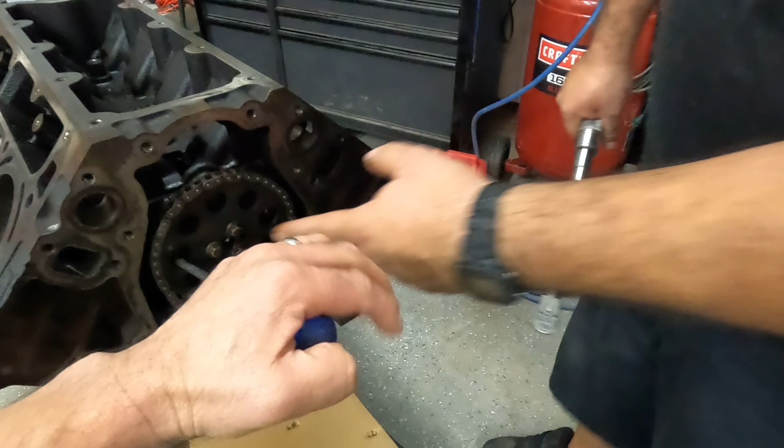There we go. It's time to torque down the sprocket onto the cam. This is at 26 foot-pounds. And I don't have a flex plate and I don't have anything to hold the crank, so we're just gonna put a screwdriver on that retainer and the sprocket, as you can see there. There's the bolt back there. We're gonna see if we can hold it for him. Yeah.

And there's 1, 2, 3, and it's always good to go back over it. Make sure you don't have one that gets loose, because it'll happen sometimes, you know.

Okay, cam is done, chain is in, all the pistons are re-ringed and done, everything's tightened down, all torque to yield is ready to go. The rotating assembly is done at this point. Nice. Sometimes a little bit of hard work, dirty hands, and just that mindset to do it. You learn a lot of stuff along the way, and it's awesome.

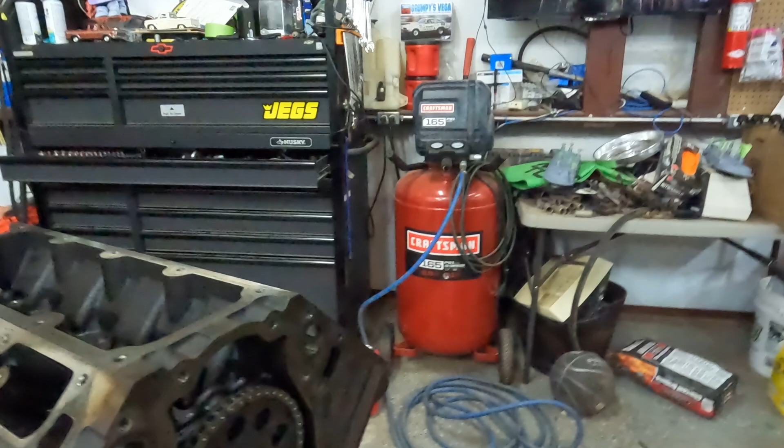Question. Yeah. Do you ever put any Loctite on these, or is just tightening and torquing good?

Yeah, I'm glad you mentioned that. I was supposed to put Loctite on these and I forgot. Okay, do put Loctite on these. You don't have to put anything like red, because red, that's too much. Blue Loctite is perfect. So I will be taking these back out here later and just putting Loctite and doing the same process. Yes, just do the same process.

There's a lot of guys out there that will probably judge me on this, but I do like to torque all my stuff down. Reason why is if there's a torque spec for it, use it, especially on something like this part. It's very critical, because you never know. Yeah, I actually had a friend tell me that he did all his rod bolts, he torqued them. He missed one piston. He did not do the angle degree on it, and that piston did fly out. He was using it on a race car engine.

So it is important. There's some guys out there like, nah, I don't do that. It is good to do it. It's good to keep that trait on you, because you never know. And being that this is my budget build, I want it to last. So I'm gonna do everything I can to torque everything down. Yeah, everything. Even the intake. Yeah, I took my intake down.

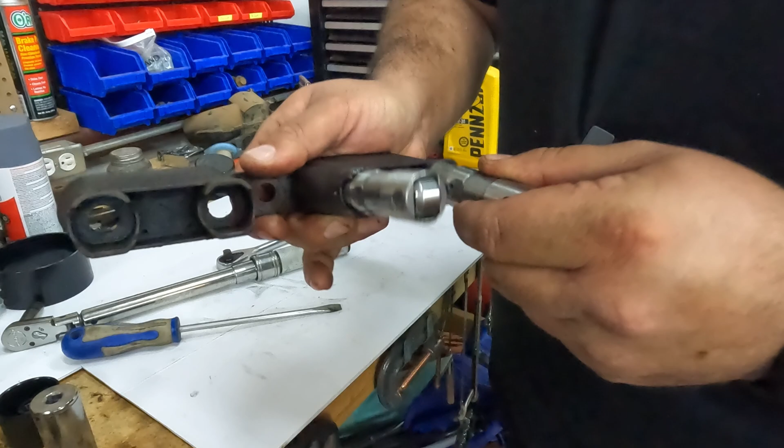So the way you install these, here's your little tray keeper. There's a certain way, as you can see how it's squared off here. You're gonna put your square end where this little retainer is. That's where your push rod goes. So you're gonna put your square in with that. And this kind of temporarily holds it while you install them. Let me see, there we go. So these kind of keep them locked in place.

Once you put these in here, then you can slide them in, like so, into the ports that they go in. You slide it in and then you bolt it down, which I'm not going to put them in because then they'll get stuck in there. And these go in before the heads do. Trust me, you don't want to leave these out. Yeah, those are the ones that push the rod up and down. Yep, this is your valve opener. So you might want to put those in first before anything.

All right. Other than that, the heads are basically built. I did not do any head work to them. The valves were pretty clean when I took them apart. The springs came with the kit as well. So all that was installed and done. Just got to clean them up a little bit. All right. Call it a day after that.

Well, there's all that today. That was pretty cool right there. Of course I didn't do it, but hadn't been around this. We've done some, but it's been a long time. So it refreshes your memory a little bit as well. Yeah, me as well. Learn a little bit. That's all for today. I know it's going to be a little bit of a long video, but if someone's doing it, they could actually follow it step by step.